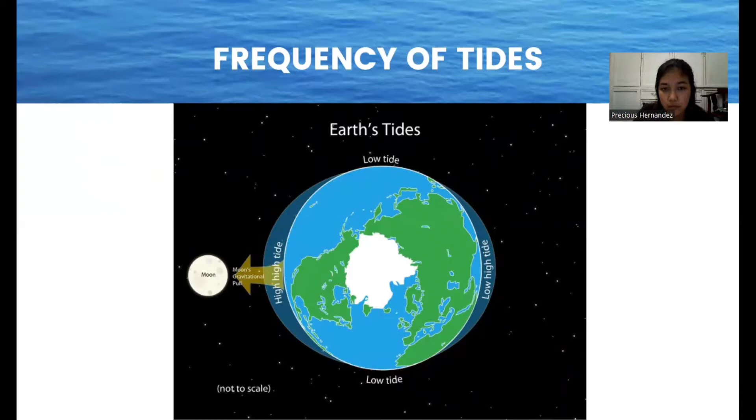If high tides are caused by the gravitational pull of the moon on Earth, why would there be high tides on the side of the Earth opposite the moon? So it's asking why there are still high tides even when the Earth is on the side opposite the moon.

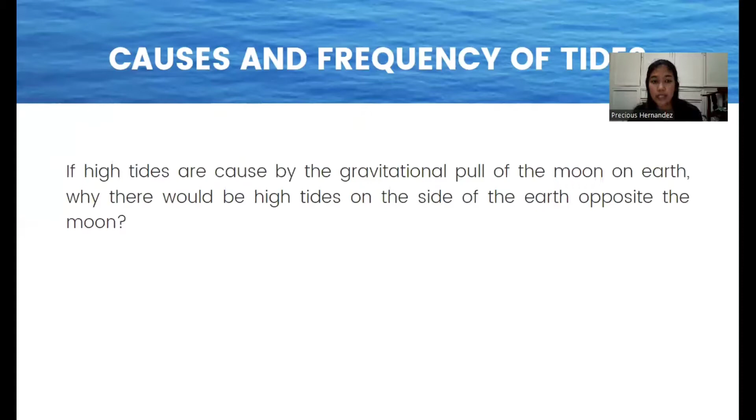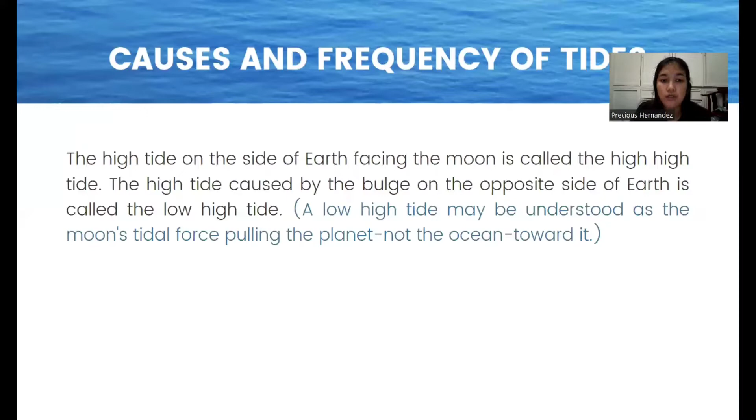The high tide on the side of Earth facing the moon is called the high high tide. The high tide caused by the bulge on the opposite side of Earth is called the low high tide. As I said earlier, we have two high tides and two low tides, and these two high tides are the high high tide and the low high tide. So when the direction is facing the moon, it's called the high high tide, while when it's on the opposite direction, it's called the low high tide. A low high tide may be understood as the moon's tidal force pulling the planet, not the ocean, toward it.

This explains what happens on the side facing the moon. The gravitational attraction between the Earth and the moon is strongest on the side of the Earth facing the moon, simply because it is closer. This attraction causes the water on this near side of Earth to be pulled toward the moon. As gravitational force acts to draw the water closer to the moon, inertia attempts to keep the water in place. But the gravitational force exceeds it and the water is pulled toward the moon, causing a bulge of water on the near side toward the moon.

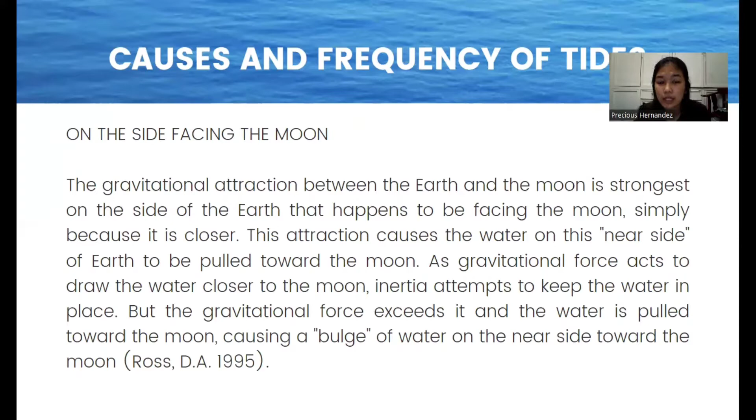So sinasabi dito na kapag naka-face yung side na yon sa moon, malakas yung gravitational pull kasi mas malapit sa moon. Tapos yung inertia, siya yung force na nagki-keep intact dun sa may water. Pero yung gravitational force ay mas malakas kasi mas malapit siya sa moon, kaya nagkakaroon siya ng bulging ng water.

So dito naman, on the side opposite the moon, on the far side, the gravitational attraction of the moon is less because it is farther away. Here, inertia exceeds the gravitational force, and the water tries to keep going in a straight line moving away from the Earth, also forming a bulge. Gravity and inertia act in opposition on the Earth's oceans, creating tidal bulges on opposite sides of the planet.

On the near side of the Earth, the side facing the moon, the gravitational force of the moon pulls the ocean's waters toward it, creating one bulge. On the far side of the Earth, inertia dominates, creating a second bulge.

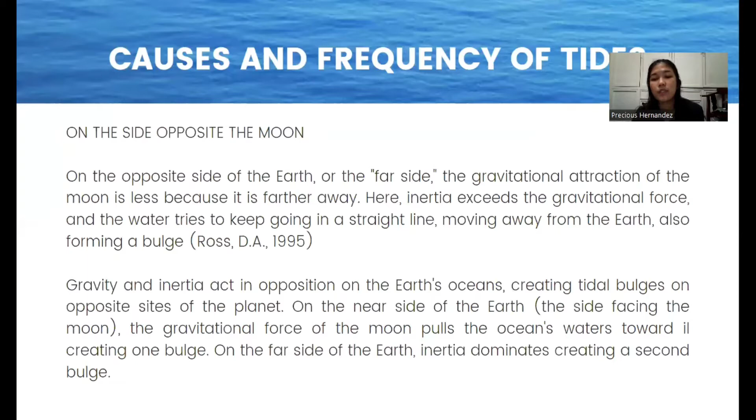So sinasabi dito, makikita natin sa picture na to. Ito yung side na naka-face sa moon at ito yung side na opposite direction sa moon. So yung bulge dito, yung tidal bulge na nangyayari sa side na nakaharap sa moon ay dahil sa gravity, dahil mas malakas yung gravitational pull doon kesa dun sa inertia. While dito naman, sa may opposite side ng moon, yung tidal bulge niya ay dahil sa inertia.

Ang pinaka-reason dito ay yung planet, kapag ito ay nasa opposite side ng moon, yung planet yung pinupull ng gravity. Yung water nagmo-move away sa Earth, kaya nagkakaroon siya ng bulging. Kaya kahit nasa malayo siya o nasa opposite side siya ng moon, nagkakaroon siya ng bulging of water, kasi nga dinodominate siya ng inertia. Bale kapag nasa opposite side ng moon, yung gravity tsaka yung inertia, nag-a-act siya oppositely, kaya nagpo-form pa rin siya ng bulge.

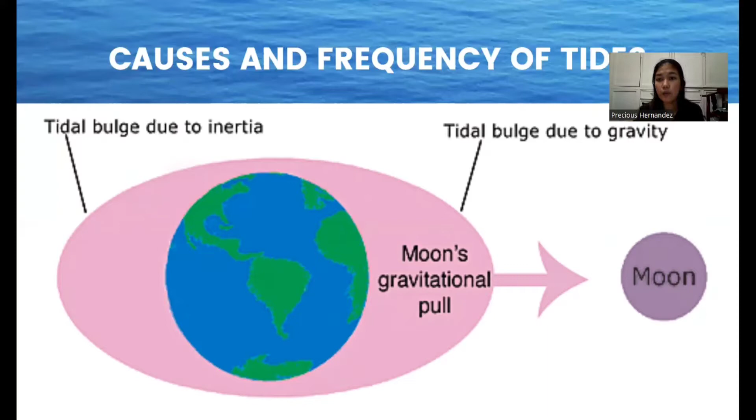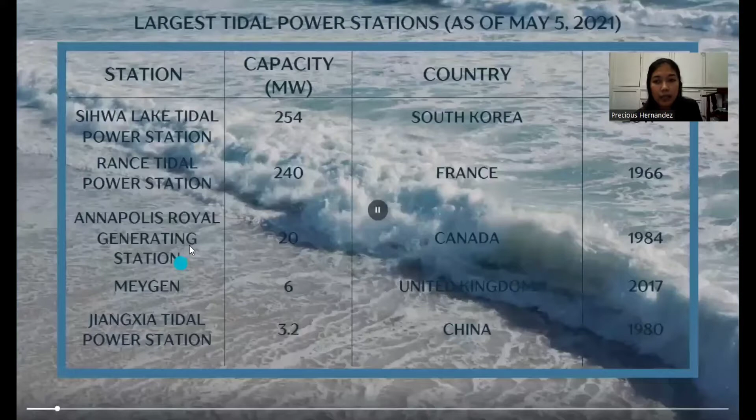So dito, meron tayong table na nakalagay yung largest tidal power stations as of May 5, 2021. So meron tayo ditong 5 stations, kasama na rin dito naka-indicate yung capacity niya in megawatts, kung saan siya located, at kung kailan natapos. So yung first station natin dito is yung Sihwa Lake Tidal Power Station.

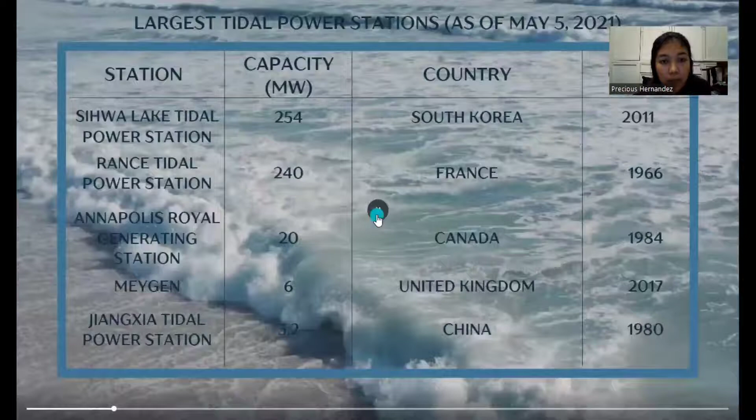Meron siyang capacity na 254 megawatts at matatagpuan siya sa South Korea. Natapos yung power station na to noong 2011. While yung second largest naman na tidal power station is yung Rance Tidal Power Station na may capacity na 240 megawatts na matatagpuan sa France. Makikita natin dito na siya yung parang pinaka-una dito na natapos o nagawa, kasi 1966 pa lang ay nakatayo na siya.

So next is the Annapolis Royal Generating Station na may 20 megawatts capacity na matatagpuan natin sa Canada at naitayo noong 1984. The fourth one is the MeyGen, which has the capacity of 6 megawatts, located in the United Kingdom and built in 2017. And the last one is the Jiangxia Tidal Power Station na may 3.2 megawatts capacity na matatagpuan sa China, tapos nagawa siya noong 1980.

So itong 5 na station, makikita niyo, nakasunod-sunod siya in descending order, kung ano yung maximum capacity na kaya niyang i-handle at i-produce. Makikita nyo rito sa table na to na yung tidal energy pala ay matagal na palang nage-generate, kasi tingnan mo, 1966 pa lang, meron na.

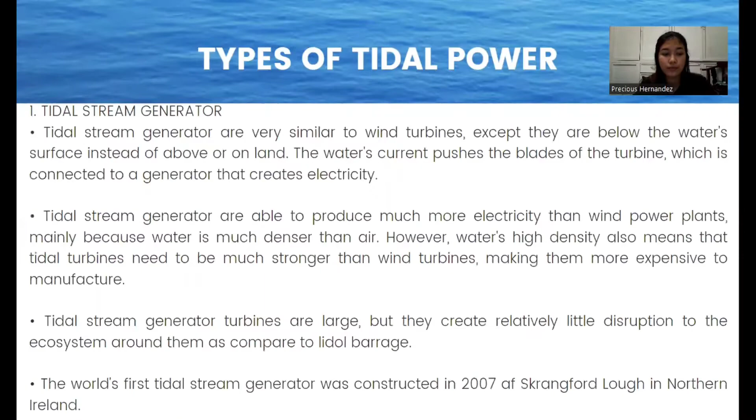So, types of tidal power. Tidal stream generator. So, ano nga ba ang tidal stream generator? The tidal stream generators are very similar to wind turbines, except they are below the water surface instead of above or on land. So, the water's current pushes the blades of the turbine, which is connected to a generator that creates electricity. So sabi dito,

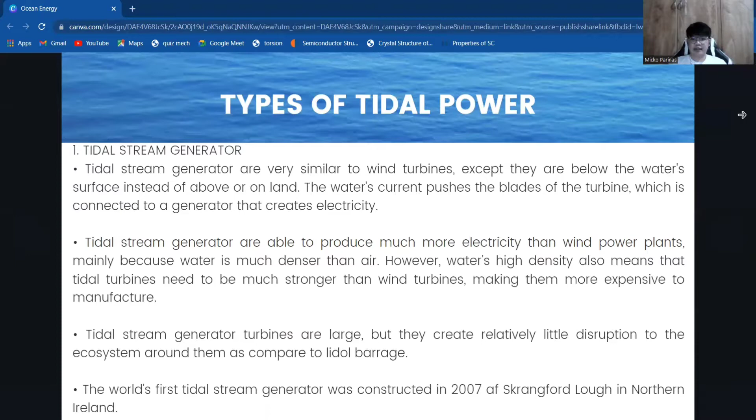Sabi pa dito, the tidal stream generator turbines are large, but they create relatively little disruption to the ecosystem around them as compared to tidal barrage. So the world's first tidal stream generator was constructed in 2007 at Strangford Lough in Northern Ireland.

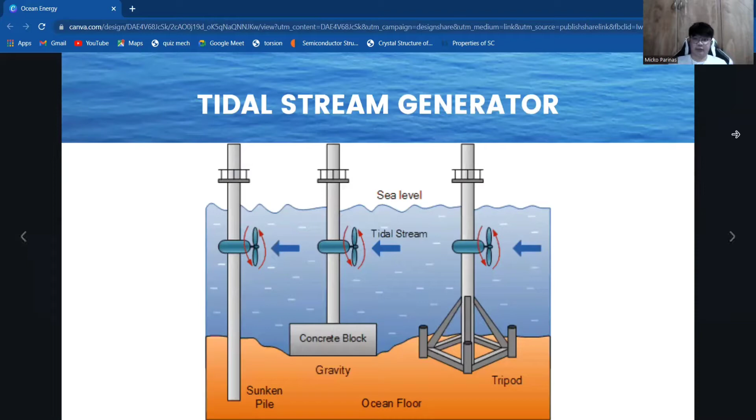So sabi sa description kanina, through the water current that pushes the blades of the turbines, and the turbines are connected to the generator that makes electricity. So next is the tidal stream generator. Ito pa ay isang 3D example ng isang tidal stream generator.

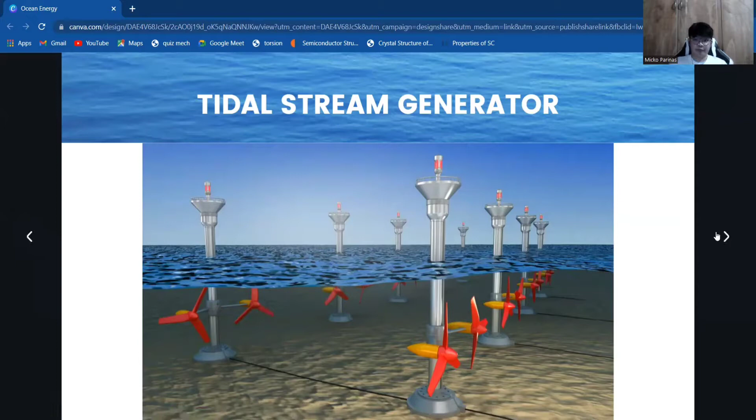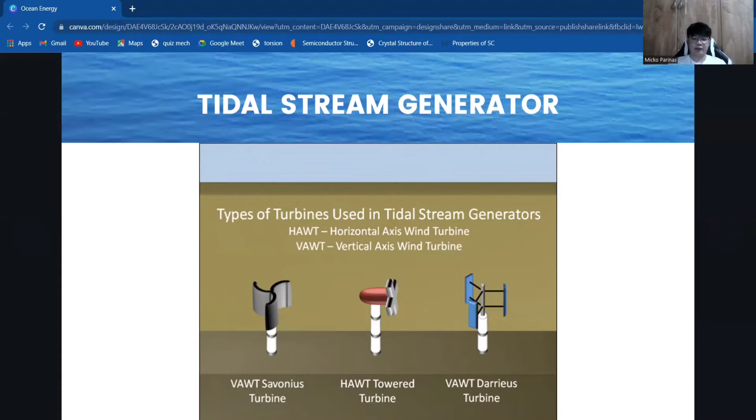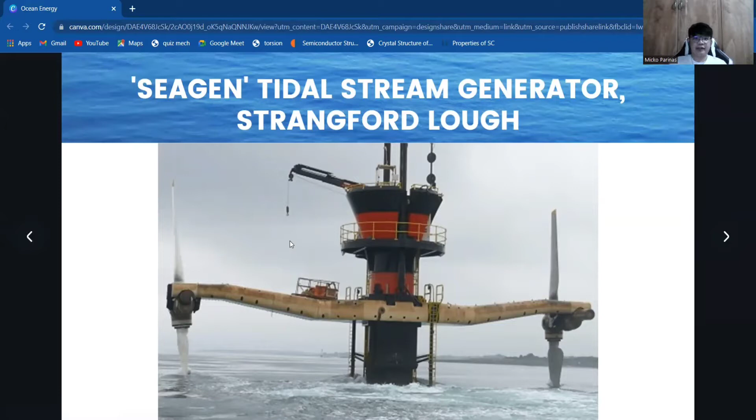So types of turbine used in tidal stream generators. The first one is HAWT or horizontal axis wind turbine. It's also known as axial flow turbine. So sa type ng ganitong turbine, ang rotor nito ay parallel axis to the tidal currents, while the VAWT or vertical axis wind turbine, ito ay may rotor na ang axis ay normal to the tidal currents. So this is an image of the SeaGen tidal stream generator, Strangford Lough.

Good day, I'm Victor Tidal and I'm here to discuss tidal barrage and tidal lagoon. The first one we have here is the tidal barrage. What is tidal barrage? Tidal barrages are low-walled dams usually installed at tidal inlets or estuaries. Similar to traditional hydroelectric dams, sluice gates are used to create a reservoir on one side of the barrage.

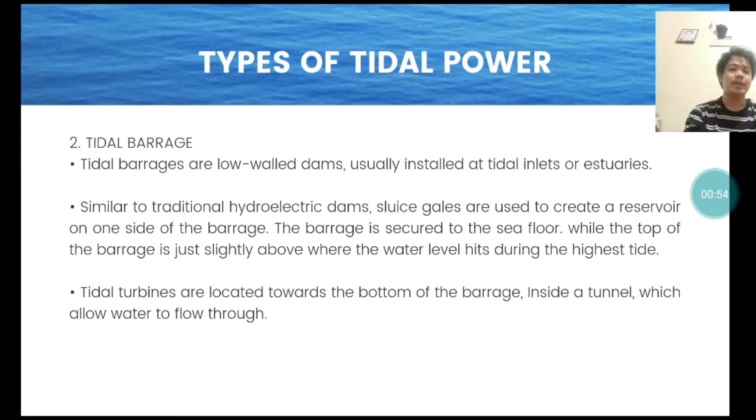The barrage is secured to the seafloor while the top of the barrage is just slightly above the water level during the highest tide. Tidal turbines are located towards the bottom of the barrage, inside a tunnel which allows the water to flow through. Tidal barrages look like traditional hydropower dams. Turbines located along the bottom of the barrage are turned with the incoming and outgoing tides.

During an incoming high tide, water flows over the turbines as the water rises. Then the water flows back through the turbine as it becomes low tide. The turbines are connected to a generator which produces the electricity. After a construction phase lasting 5 years, the Rance Tidal Power Station was opened on the 26th of November 1966. This was the first power station to take advantage of tidal water flow to produce electricity.

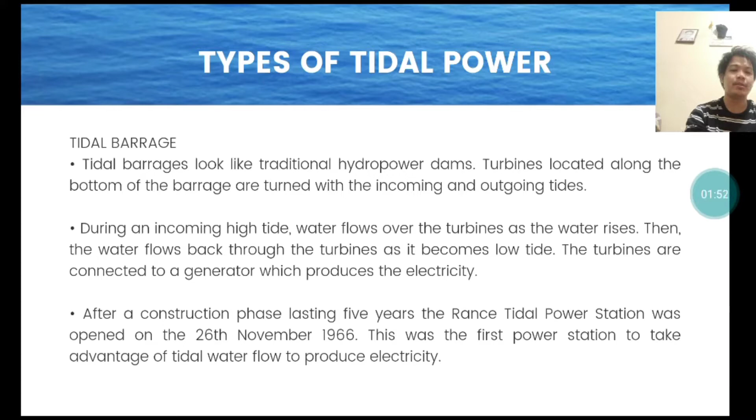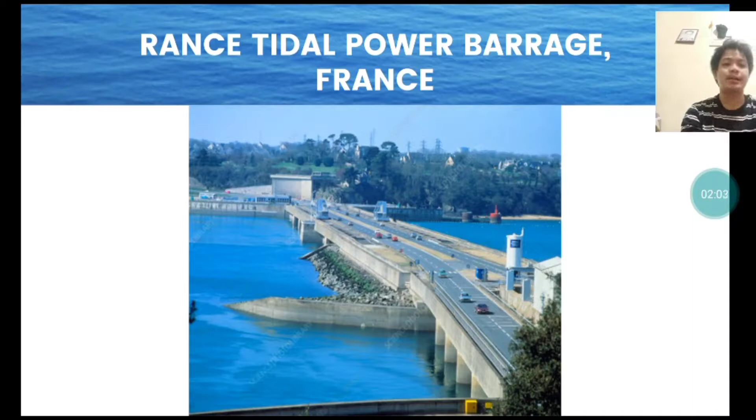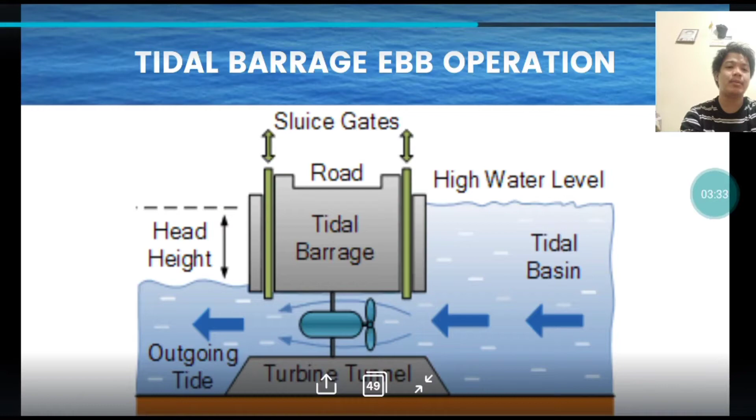Today I'm going to do a short video about tidal power generation, and I'm going to try and do it in about a minute. We'll play the animation now. You can see the tide coming in on the left-hand side. This represents the ocean on the left and a bay or an estuary on the right.

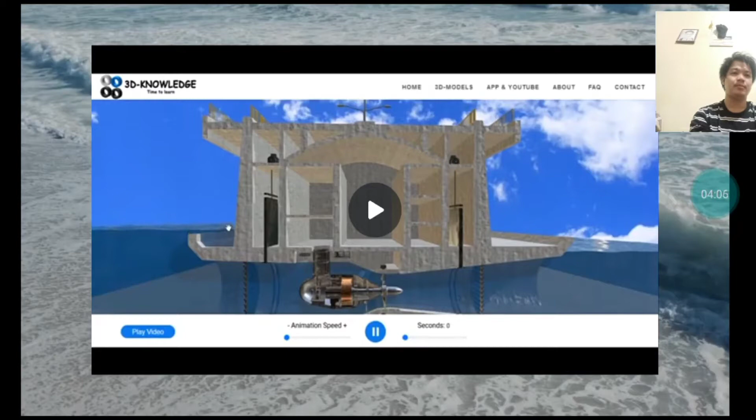We've used a concrete structure in the middle to block the flow of the tide going into the bay or the estuary area. So the tide's building up, it's going to keep rising on the left-hand side, but nothing's happening on the right. Once we've got at least 2 meters in height difference between the bay and the sea area, we're then going to open a wicket gate or sluice gates, and we're going to allow flow from the sea area to the bay area.

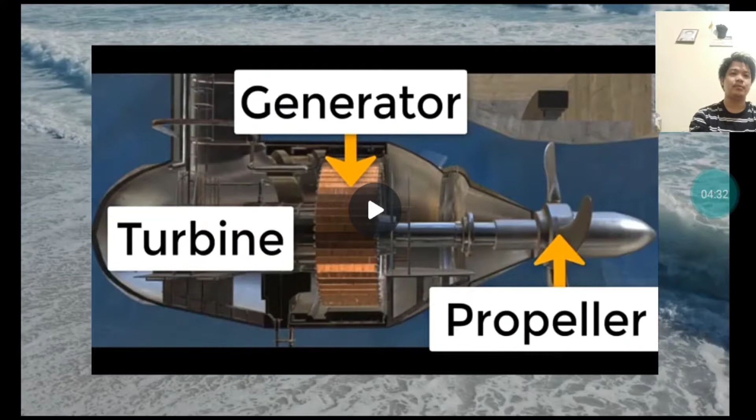We need at least 2 meters difference in head in order that we get sufficient flow. The water goes into a draft tube, flows over a bulb turbine, and causes the propeller to turn. The propeller is connected to a propeller shaft and a generator, and the generator turns and generates electricity. So we're now generating electricity just due to the flow of water through the draft tube.

We're filling up the bay area, we're maintaining a minimum of 2 meters difference in head between the two sides, and we're going to fill up the entire bay. At some point we lose this 2 meters difference in head and we stop generating electricity because there's not enough flow. So we'll fill up the bay to the same level as the maximum tide. You can see now that's leveled out, and we're going to do the exact opposite.

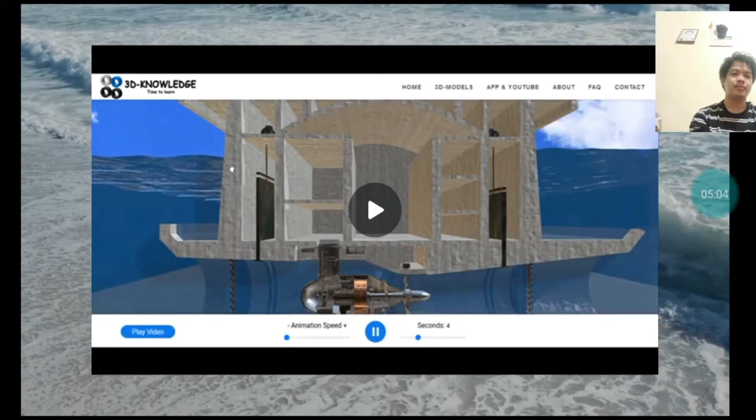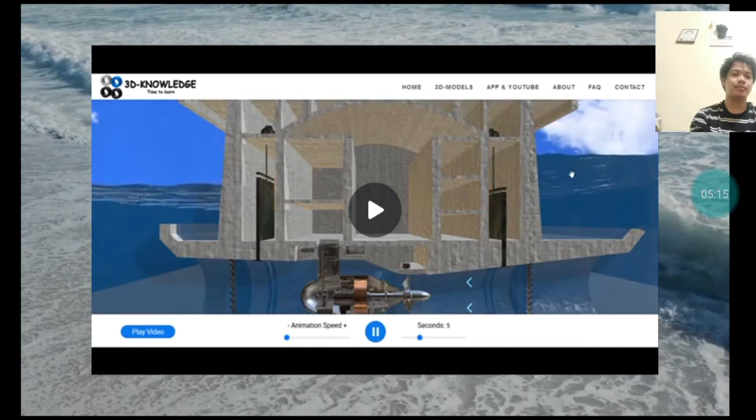Now we're going to close off the barrage again. We're going to let the sea level recede until there's at least 2 meters difference in height again between the two, and then we're going to open up the sluice gates or the wicket gates. We're going to generate electricity this time by adjusting the angle of the propeller blades slightly. As water drains out of the bay area at roughly the same speed as the tide is receding, we're going to continue to generate electricity, and that is essentially how tidal power generation works.

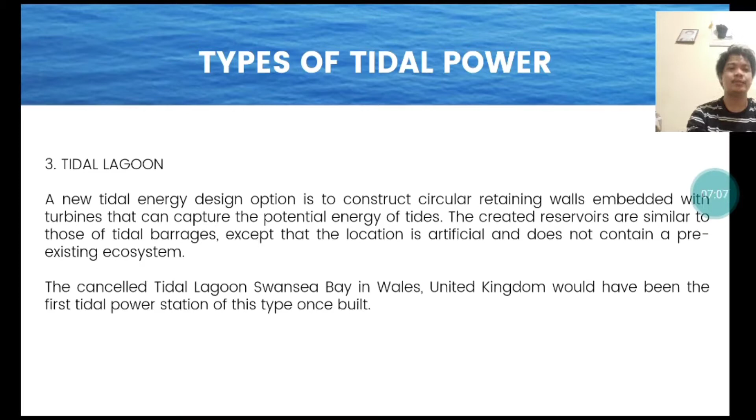Good day, this is Francois Campana and I'm going to discuss the advantages and disadvantages of tidal energy.

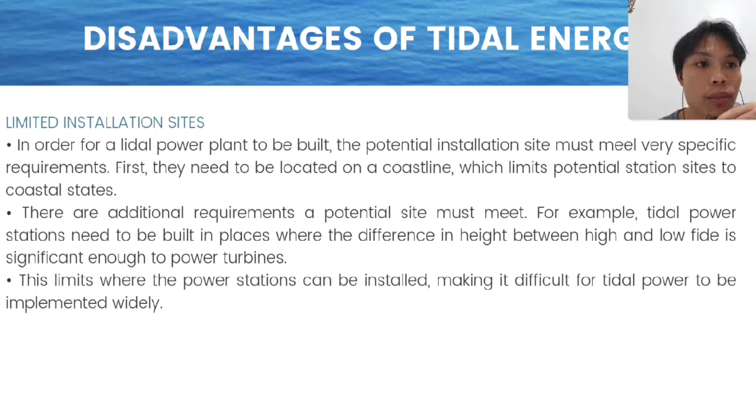For example, tidal power stations need to be built in places where the difference in height between high and low tide is significant enough to power turbines. This limits where the power station can be installed, making it difficult for tidal power to be implemented widely. Next disadvantage of tidal energy ay yung expensive. Sobrang mahal nito.

One of the biggest drawbacks to tidal power is the high upfront costs. Tidal energy turbines need to be much sturdier than wind turbines because of the high density of water. Most of the tidal power plants that are currently in operation are made of tidal barrages. The construction of a tidal barrage is extremely expensive.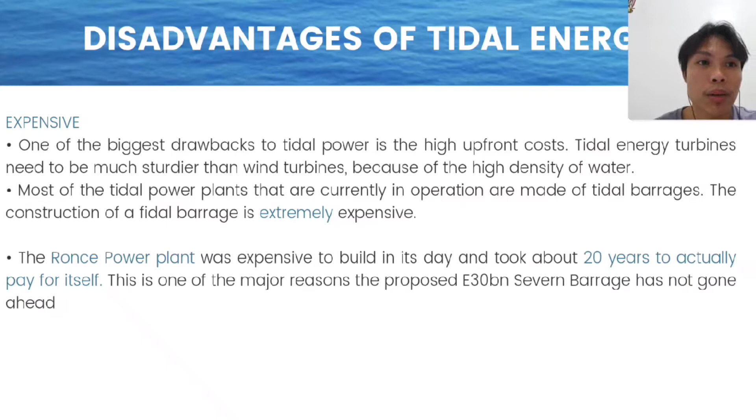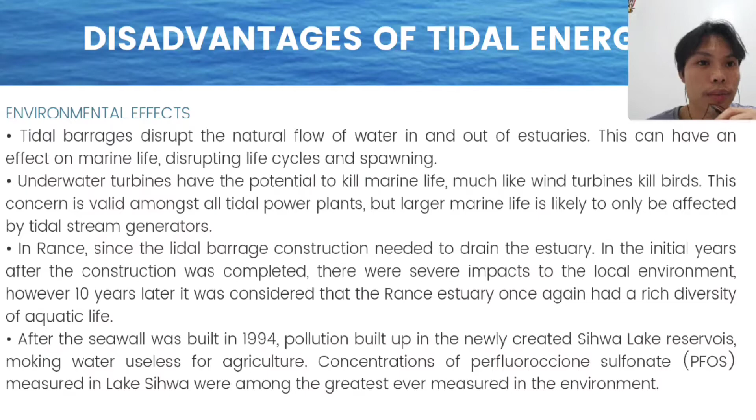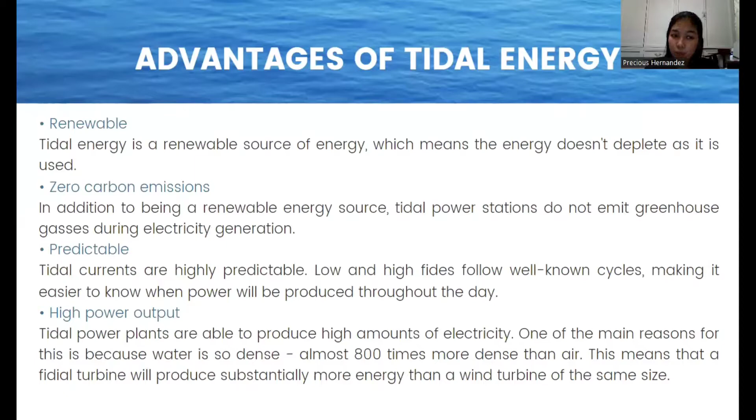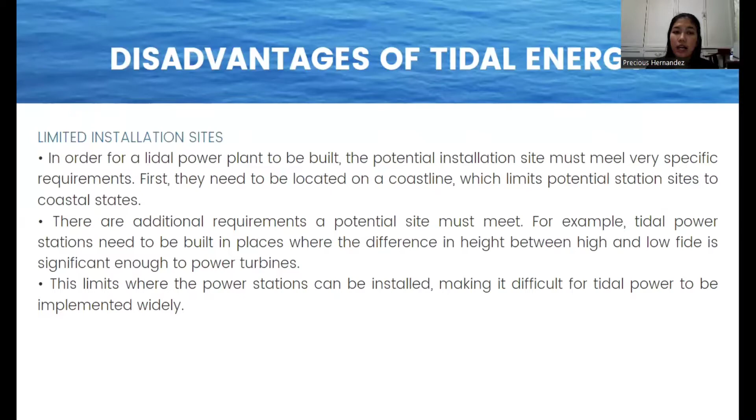So we have 3 types of tidal power, and these are the tidal stream generator, tidal barrage, and the tidal lagoon. The advantages of tidal energy are it is renewable, it has zero carbon emissions, it is predictable, and it has high power output, while the disadvantages of tidal energy are it only has limited installation sites, it is expensive, and lastly, it has environmental effects.